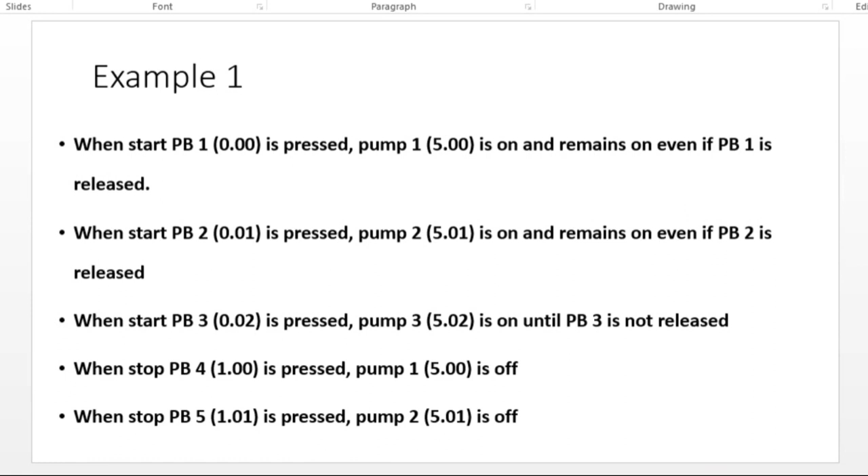In this session, we are going to see some examples for latching and unlatching concepts using CX Programmer. So for latching, let's see example 1. When the start push button is pressed, pump 1 is on. If the push button is turned off, it should remain in the on condition.

When start push button 3 is pressed, pump 3 is on until it gets released. See, there is a difference between the first two statements and this one. When the third push button is pressed, pump 3 is on until it gets released.

The next one is when the stop push button is pressed, pump 1 should be off. We have turned on pump 1 in the first statement, and that has to be off when PB4 is pressed. Then when PB5 is pressed, pump 2 is off. Okay, so let's try to solve this problem.

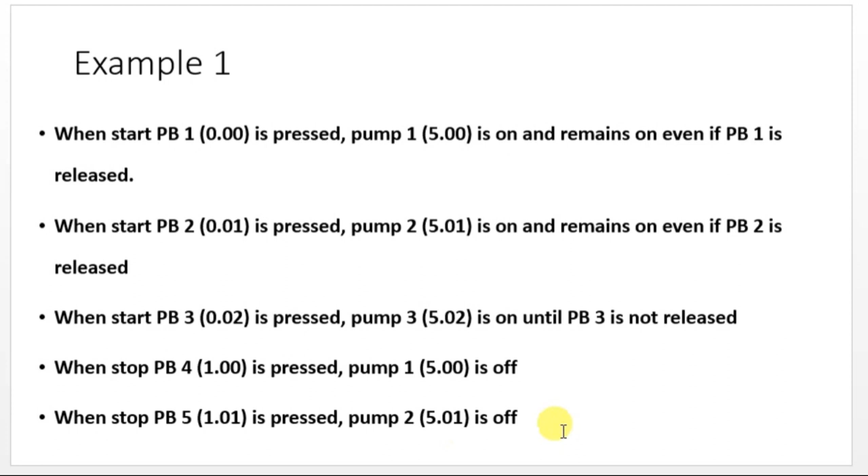Whenever you have logic like this, you have to write down all the inputs and outputs you actually have. So let's count: PB1, PB2, PB3, 4 and 5. So we have 5 inputs here and all 5 are push buttons. And we have pump 1, 2, 3. So we have 3 outputs. So in total our IO list is 8: 5 inputs and 3 outputs. Got it? So let's move on to CX Programmer and try to solve the problem.

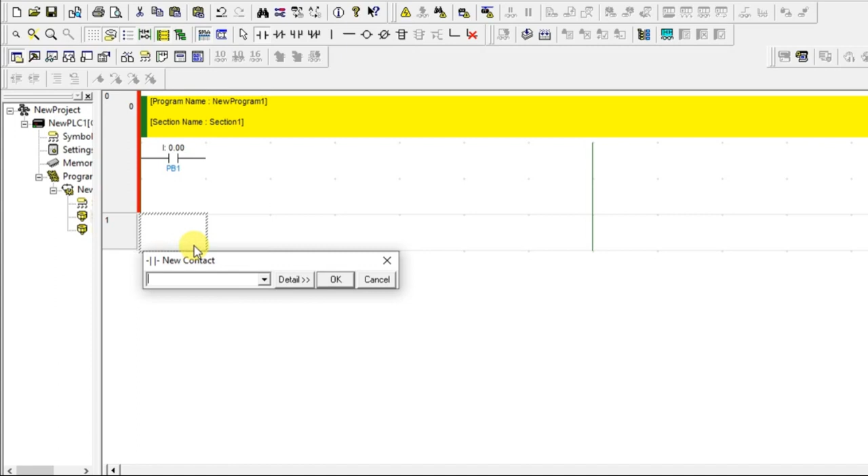In the example, they have given the addresses 0.00, 0.01, 0.02 and 1.00, 1.01. So we'll write the same addresses. 0.00 and they have given the name as PB1. So the first input is done. I'm adding the second input, 0.01, named PB2. And the third one, 0.02, PB3.

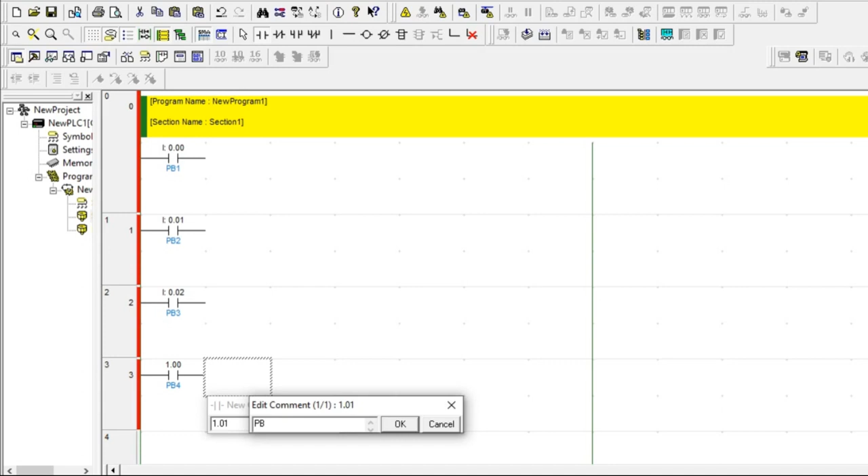And the fourth one is 1.00 and the name is PB4. I'll just put it here; later we'll see where to add that. And the name is PB5. So 5 inputs are added. Now we have to add outputs. Let's take motor 1, and what address have they given? 5.00. So 5.00 is pump 1, not motor. Pump 1.

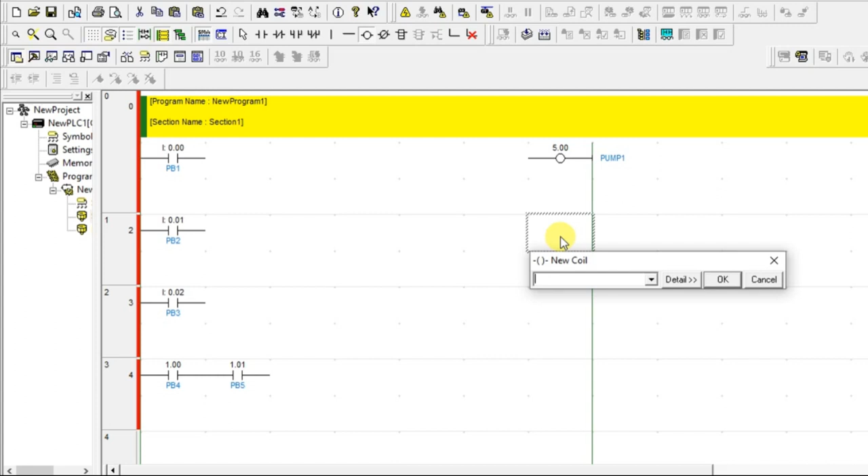So pump 1, and I'm putting one more coil, which is for pump 2. Now I'm putting the third one, which is 5.02, and that is pump 3. So now we have 5 inputs and 3 outputs. What is our first statement? Whenever push button 1 is pressed, pump 1 has to be on.

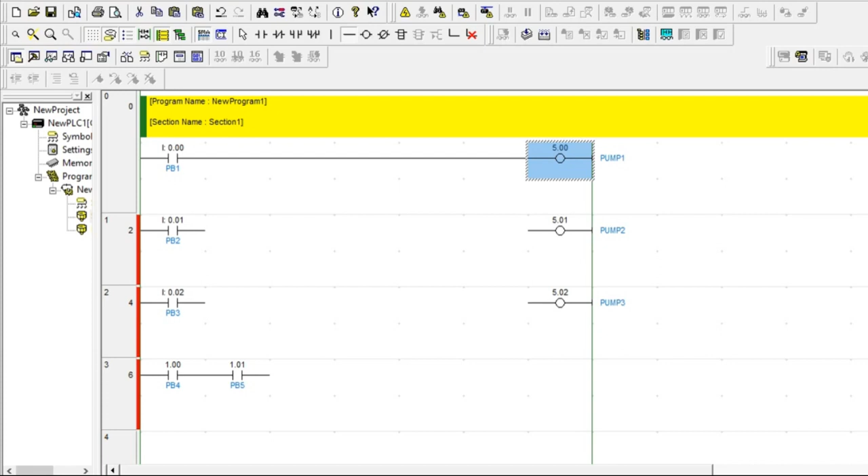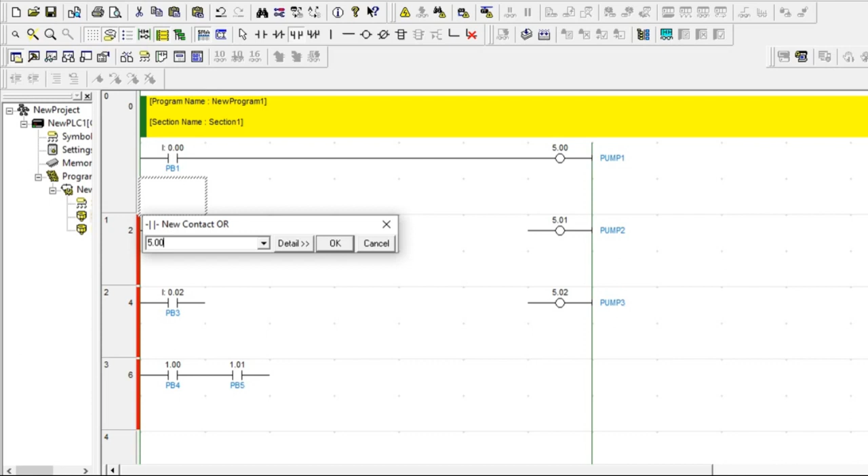So what do we have to do? When it is pressed, it should be on, so it will be a normally open contact. I'm connecting it directly like this. And what have they added? It remains on even if the push button is released. So I'll put one parallel normally open contact here, and the address should be the same as the pump. This is called latching, which we have seen already. So latching is done. The first is done.

Next, when PB2 is pressed, pump 2 should be on and remain on even if it is released. It's the same as the previous one. So add the horizontal line to make a connection, add one parallel contact to PB2 and give it the same address as pump 2. Done. The third one: when PB3 is pressed, pump 3 is on until PB3 is released.

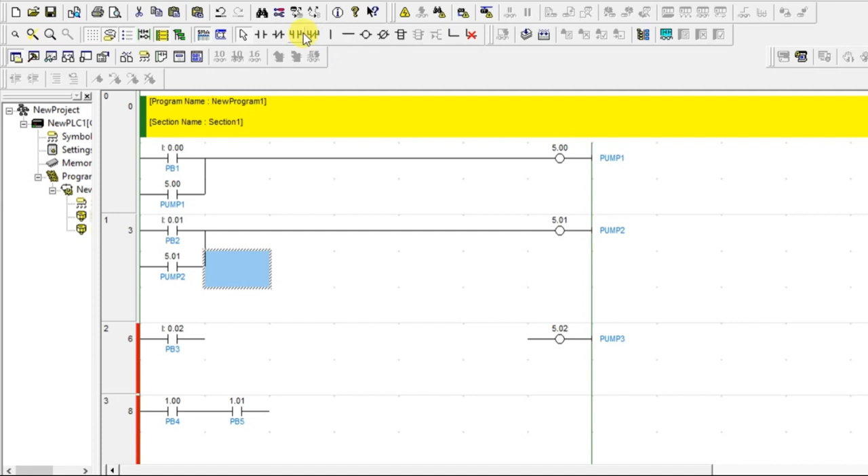So let's read the statement one more time. It looks confusing, right? When PB3 is pressed, pump 3 is on until PB3 is not released. So if you release the PB3, this fellow should be off. Correct? If you release, this will be off. If you are not released, it will be in on condition. That means what? They don't want a latching.

Correct? So if you press, pump 3 will be on. If you release, it will be off. See, here what they have given, on until PB3 is not released. So if it is released, it will be off. Right? So we have to read the statement properly to understand what they have. See, it is not similar to the previous one.

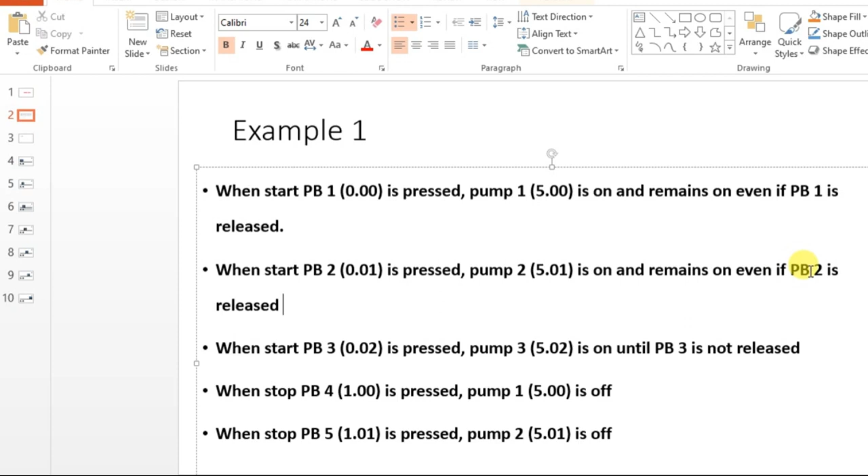So in the previous one they were asking if PB2 is off, still the output has to be on, like that they have given. But here they have given like this. See, PB3 is on, this will be on. If it is off, it will be off. So there is no need of latching it. Got it? So let's move on to the fourth one.

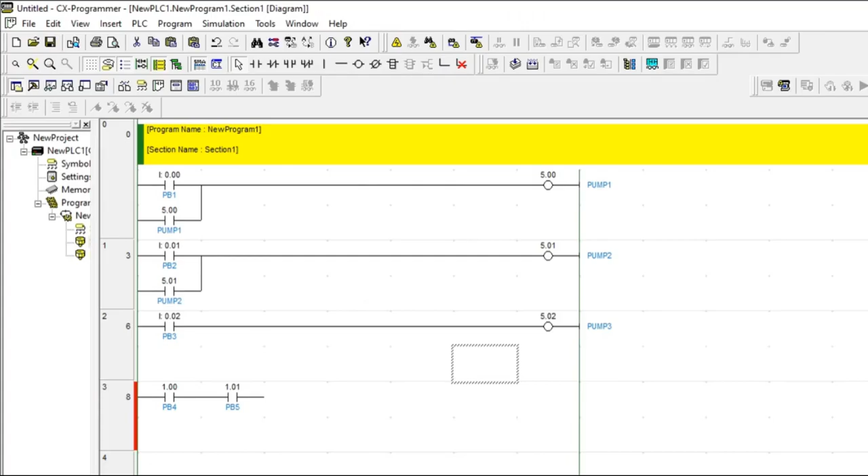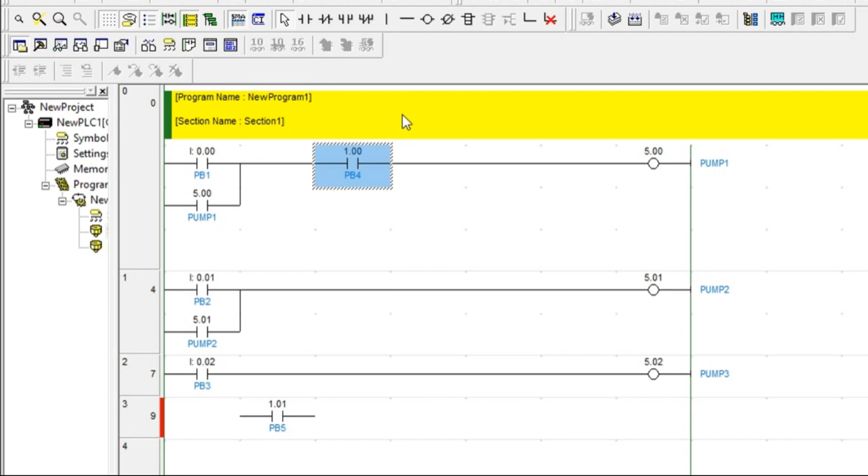When stop push button is pressed, pump 1 should be off. See, pump 1 is here and my stop push button, this fellow is here. So I want to turn off this pump 1 using this contact. So what I have to do? I have to put it here, but that should be a normally closed contact. So let's do one thing. Just press escape, add this and name that as PB4. So it should be a normally closed contact, no?

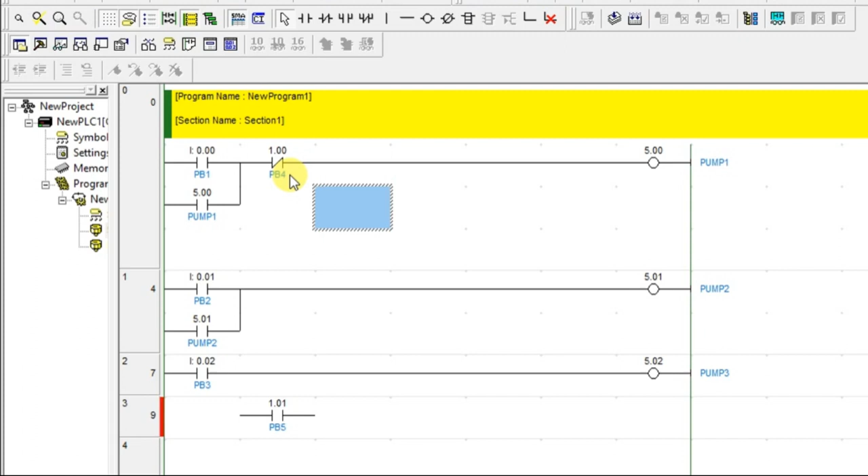I hope you have remembered in the previous session I have explained about this emergency stop. Always emergency stop or whatever stop push button, it should be a normally closed contact. Got it? And the last one is when stop push button PB5 is pressed, pump 2 is off. So they are talking about pump 2 now. So they are going to turn off pump 2 using this PB5.

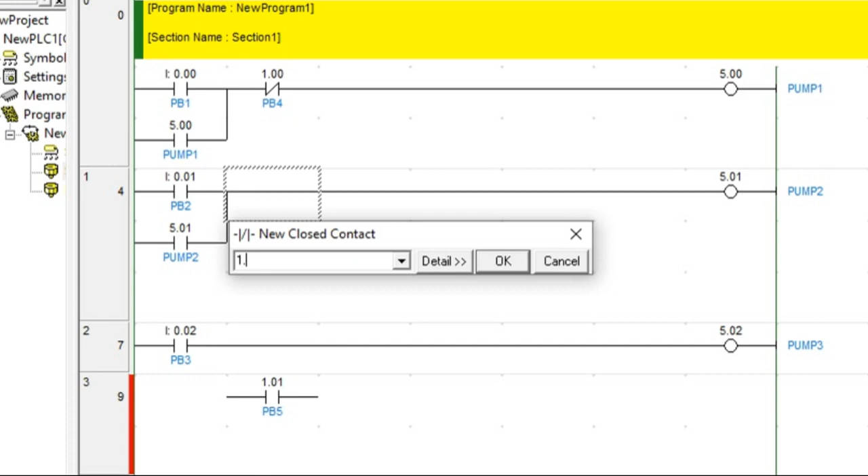So what I'll do, I'll add one normally closed contact here and name that as 1.01, which is push button 5. Done? That's it. This is latching, and this is unlatching. Very simple, no? So let's save the file and go for the simulation. Give this as 3. Let's turn on the simulation.

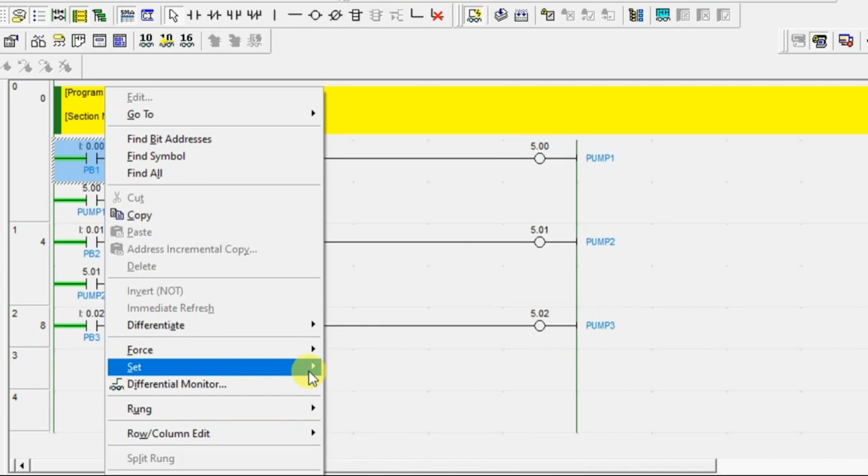So what I'm going to do, pump 1 is going to turn on using push button 1. So I'll press the button, pump 1 is on. If I release the button, still pump 1 is on. Okay. Next, I'm going to turn on pump 2 using the next push button. Yes, it's on. If you turn off, my pump 2 is still on. When I'm turning on push button 3, pump 3 is on. If I turn off, it will be off.

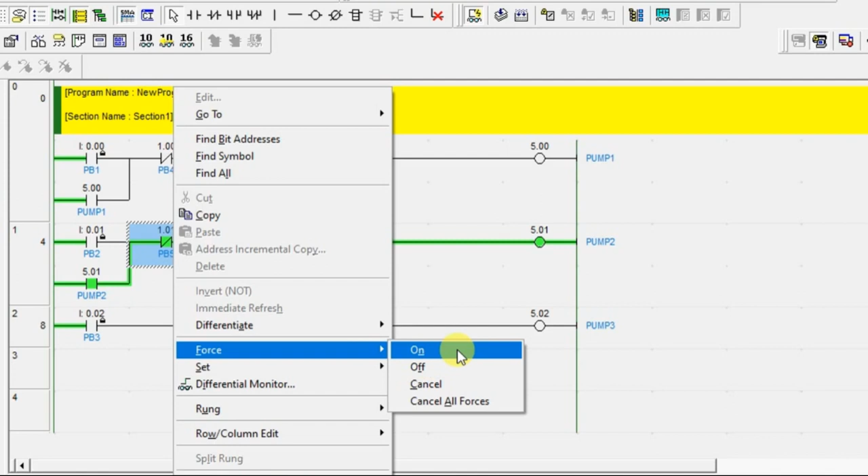That's it. Correct. Now, when pump 1 has to be off, you have to turn on this PB4. So it is off. When you turn on this PB5, your pump 2 is also off. Got it? So like this only. See, if you release this push button again, your output will not be in on condition, because once it is unlatched, it means unlatched. Again, if you want to turn on, you have to turn on this.

The first, sorry, this is not this one. See, since it is a simulation, I am able to force this output. So I'm going to turn on this. That's it. Got it? So very simple. So that's it about example 1.